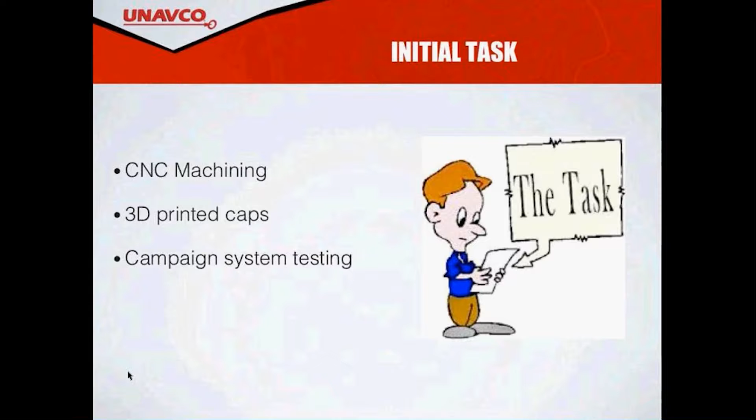So to start off, my first day meeting Jim, he gave me 3 initial tasks. One being CNC machining. He wanted me to become familiar with that, kind of get UNAVCO going with that CNC machine. And then he also wanted me to 3D print some caps for the campaign systems. And then I also did a lot of campaign system testing. I did that a lot with my mentor, Bob. I don't know if Bob is here. Oh, there's Bob. So yeah, Bob helped me out a lot, taught me a lot, testing these systems, getting them ready for researchers, making sure they're not faulty, and doing that quality control.

So going on in the CNC process, I had to really figure out what CNC is. And so CNC stands for Computer Numerical Control. It's widely used in manufacturing, not much with mass production, but a lot with customization and prototyping. This machine takes a code called G code, which I'll explain a little bit later, and it basically becomes a very highly precise tool that can cut metals in ways that many machines can't.

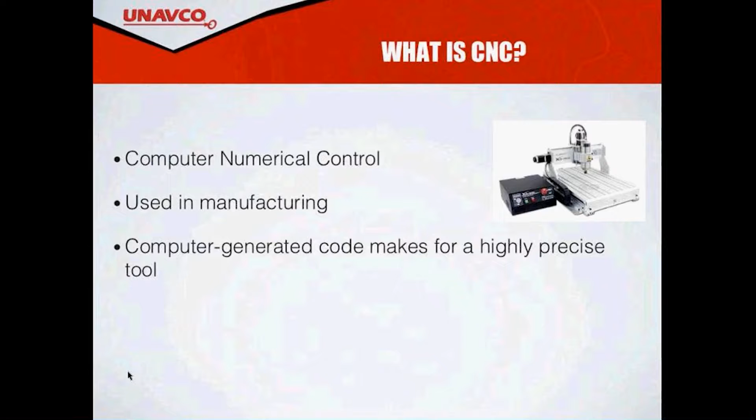So going on with the CNC processing, I had to start off by creating, here, I have the part right here. I'll just hold it up. So this is a rim bender. It's a bike tool. I've personally never used it, but it is a good tool to learn what the CNC machine can do. So what I had to do is I took calipers, tape measure, whatever I could get my hands on to measure this tool and get the right dimensions.

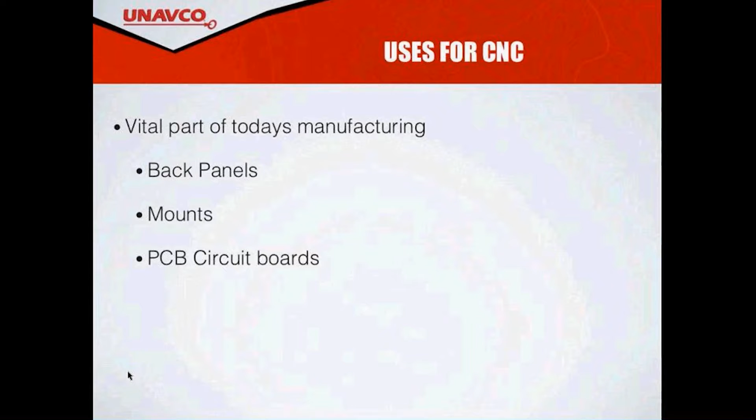So also I came up with, we don't do much with PCB circuit boards, but we do have the ability to draw electrical paths and drill holes for whatever you want to solder to that circuit board. So moving forward, oh, sorry, it went up. So moving forward, my next task was to 3D print caps.

I know, I'll get into it. It's great. So 3D printing, the 3D printing team, Jody and Dylan, helped me out a lot on this. But basically what this is doing is taking an STL file, something like my CAD drawing, and making it a tangible object. This also uses G-code like the CNC machine. You probably could make the CNC machine into a 3D printer. I just don't even know where to start with that.

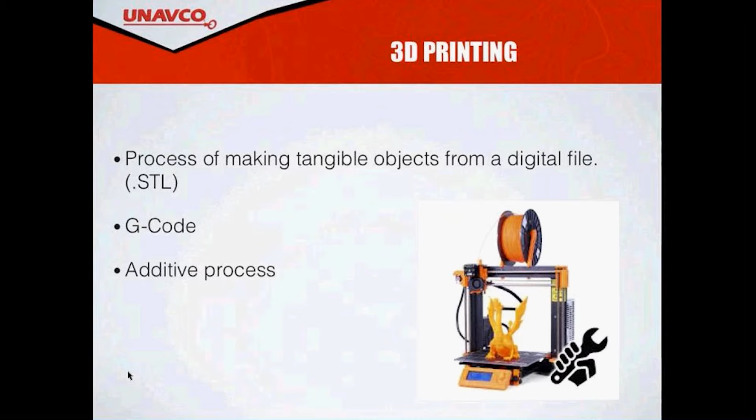But the way it makes these objects is through an additive process, basically meaning it builds things layer by layer. So it slices objects into a... I'll explain later. But it's an additive process, and it builds these objects using layers.

So this was our original cap that goes to the campaign systems. We're no longer able to use these caps anymore because our manufacturer no longer sells them to us. So I was told to make these caps by myself using the 3D printer. And so I got this file from Keith, and it was this exact cap. And so I went ahead and I printed the cap.

And the only problem with this cap is it has these little notches on it. So when it's sitting on the printer like this, it has to use a lot of support material, so that takes a lot more time. So I went ahead and I got rid of those notches, and I made a division symbol, basically. With this division symbol, you can use pliers, anything flat, for instance a flathead screwdriver, a quarter. But I'm not too worried about field engineers trying to figure out how to open this.

Yeah, if that's a problem, then maybe we should figure out what we should do with those engineers. So, but maybe they shouldn't be out in the field. No, it's a joke. It's a joke. Sorry. All right. If you can't open the cap, okay.

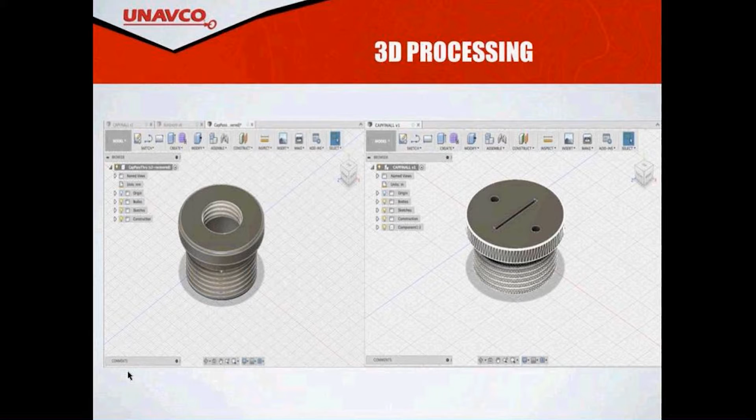But okay, so to the left is a pass-through. Bob and I made 5 PolaRx5 campaign systems that had to be shipped out for this solar eclipse that's coming up, and we didn't have them, so we had to make those. Bob gave me that great idea. So it took me about 10 minutes to design that, and then to print that out took a little bit longer.

But moving forward with that, this right here is a program called Slicer. Basically what Slicer does is it slices the object to make that additive process. So each cap takes about 36 minutes to print. And like I said, you export as G-code, you save the file to the SD card, and the printer prints from that SD card. To get 4 to print, it's as easy as a simple copy and paste, but that will take longer than 36 minutes to print. For instance, it'll take around 2.5 hours.

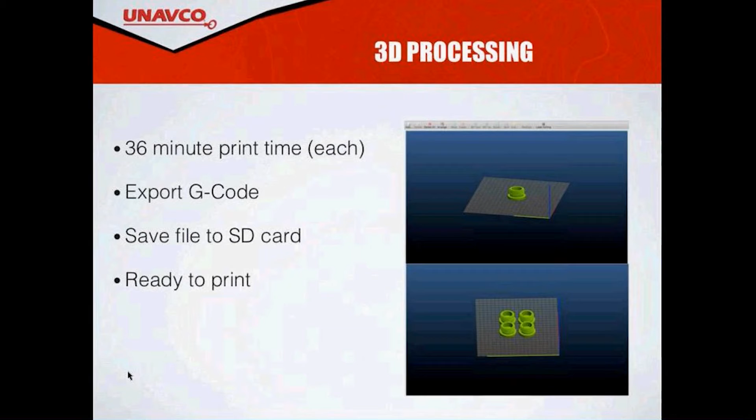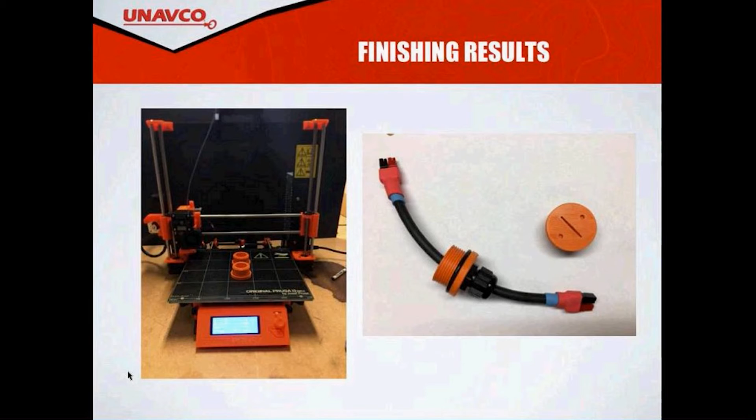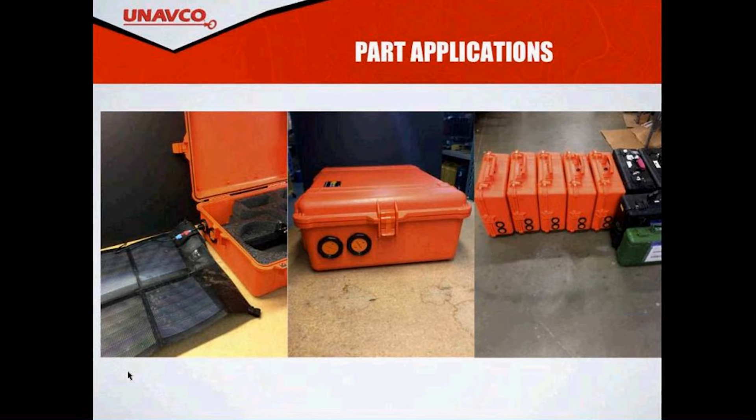So here's my finishing result. This is what the print looks like when it's done right off the printer. And this is the completed pass-through and the completed cap. And I also wanted to show you guys the 5 campaign systems. These are the parts being applied. Basically, we have the pass-through connected to the solar panel, and then we have the 2 caps, just a zoomed-in picture of those being applied. And then the 5 campaign systems getting ready to be shipped out, right next to the loading dock and ready to go.

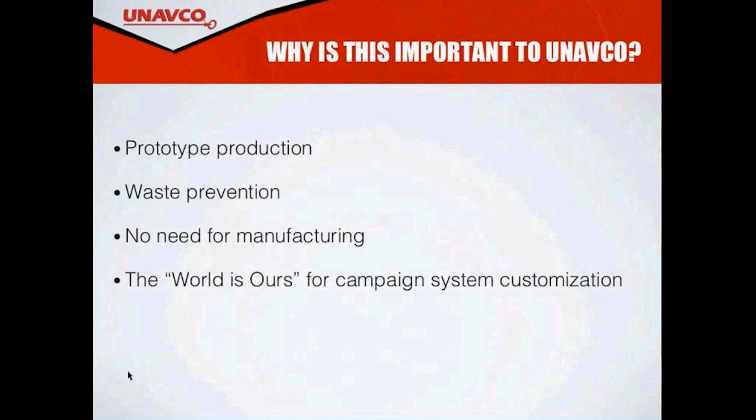So why is this important to UNAVCO? 3D printing can benefit UNAVCO through prototype production. It's very good for prototyping. If you really wanted to, you could take your prototype and send it to China and get it molded and manufactured. But manufacturing is not really needed for UNAVCO. Sorry, I just have one more slide. All right, so yeah, waste prevention. No need for manufacturing because we don't need a wide range of these caps. And the world is ours for these campaign system customizations. If a field engineer has something to say about my division symbol or whatever, we can always re-replicate to their needs.